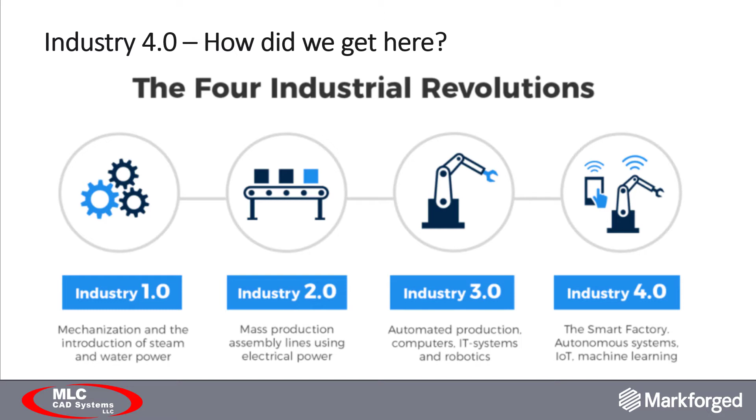So Industry 4.0 really started to take shape in the 2010s, as computers became more powerful and the internet became more interconnected than ever before. Particularly important is the introduction of the smartphone, which allowed for the development of applications that could link devices, and we began to see the widespread use of Bluetooth and wireless technology.

These days, the term Industry 4.0 is commonly used as a buzzword. We hear it all the time, everywhere, for smart manufacturing processes and how the Internet of Things has become so interconnected that it can be used to simplify the production process.

Overall, the main idea of Industry 4.0 is to create a well-rounded and holistic ecosystem for manufacturing processes, technology, and applications. This idea of smart manufacturing will revolutionize how products are developed and lead to more automation and less routine manual labor.

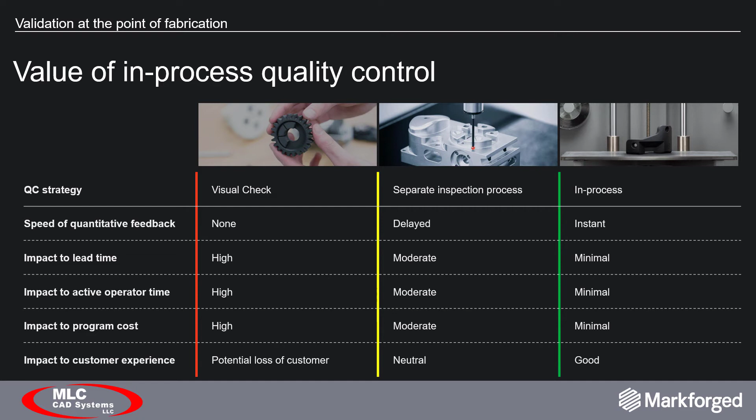Think about that. Markforged is changing this paradigm with point of fabrication inspection, with a built-in, touch-free tool chain for delivering high-confidence QC reports. The Markforged printer equipped with the Blacksmith ensures the customer gets a right part every time, with no additional cost, lead time, or skilled labor interjected into the process.

So let's talk about the process. How does this work? First we have a calibration step, and this is in order to guarantee the scan accuracy of the X7.

Customers will need to use the OEM certified reference bed to complete this automated inspection calibration process. We've created a series of automated calibration procedures designed to calibrate the device to ensure printers are in their peak condition for Blacksmith.

After calibration, you're actually ready to print a part at this stage. It will be scanned using the existing onboard laser on the X7. You will need to go into Eiger and turn on the Blacksmith toggle before slicing.

When your part is being sliced, Blacksmith will then intelligently generate a laser inspection toolpath to ensure good coverage of your scan points throughout your entire part.

Once a part is configured and a build is locked in, a user simply presses the print button and the printing and scanning process will be completed automatically with minimal impact to time.

One interesting thing to note is that because we are scanning during the fabrication process, we're able to scan hard to access and internal geometries that would otherwise be impossible to view in a single step with traditional inspection techniques.

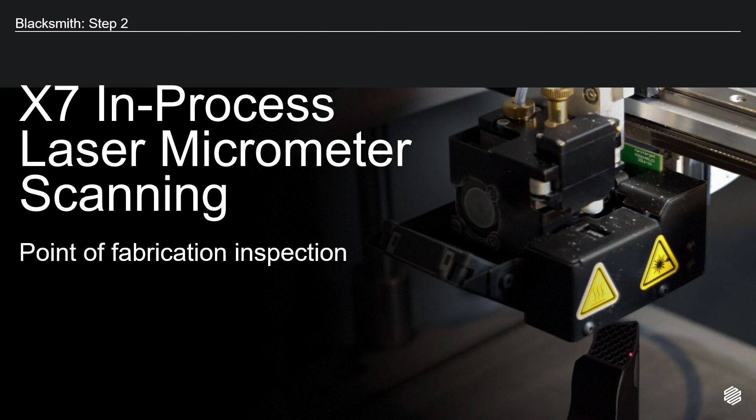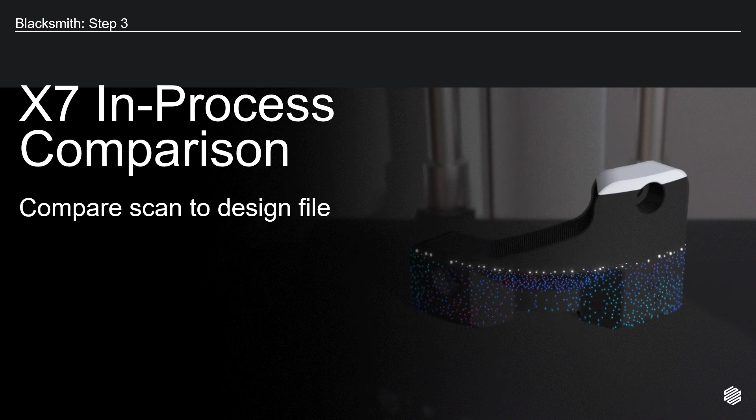So as you scan, a three-dimensional point cloud is created. Each point has a unique set of X, Y, and Z coordinates which corresponds to a measurement taken on your part. Blacksmith collects measurement data during the print and assembles a point cloud for you to review in Eiger.

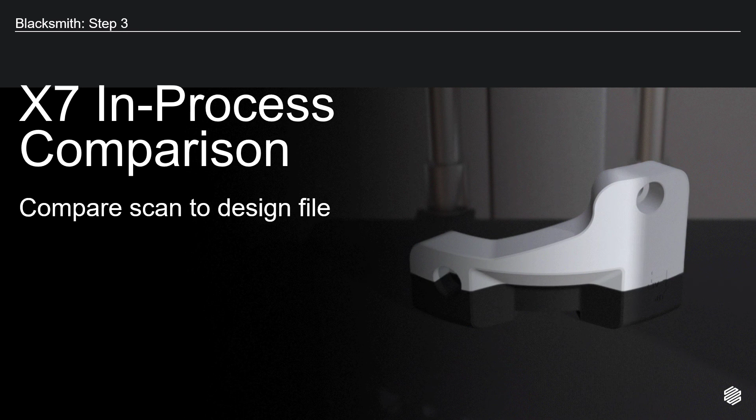This point cloud is automatically generated and overlaid on your input STL for comparison purposes.

Users can also view a part's historical scan data right on this page, making traceability easy. In the future, you will be able to create a very detailed, customizable print report that calls out specific features in your model.

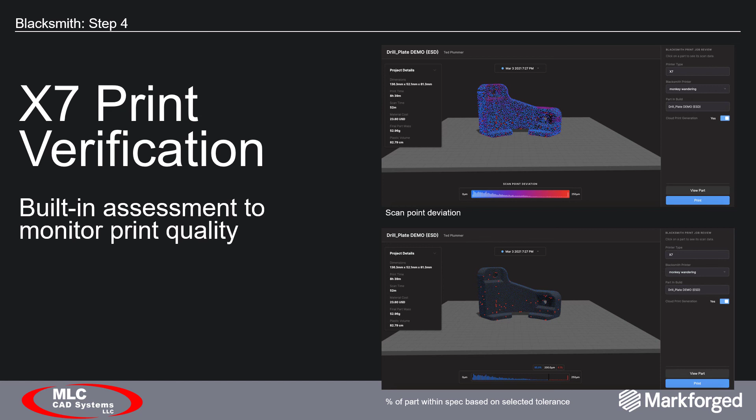Ultimately, the most exciting thing about Blacksmith is that it will very soon begin to learn at the speed of the global fleet. And what does this mean?

Each printer equipped with Blacksmith will securely send data to the cloud, helping the entire fleet get smarter. With each print, we will get closer to the right part every time.

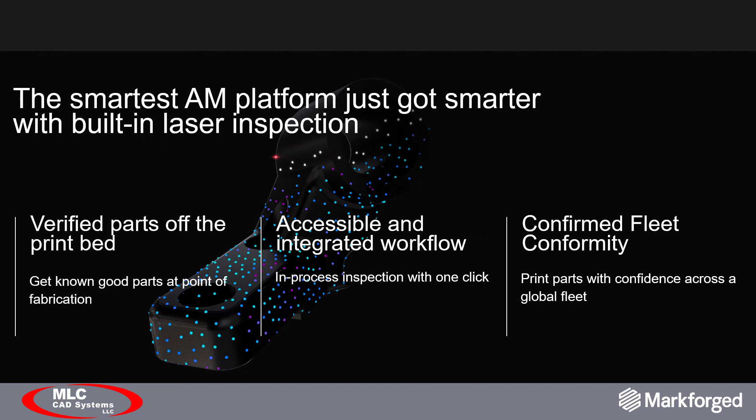So ultimately, you're going to be verifying your parts and then confirming conformity of that part as you produce that part.